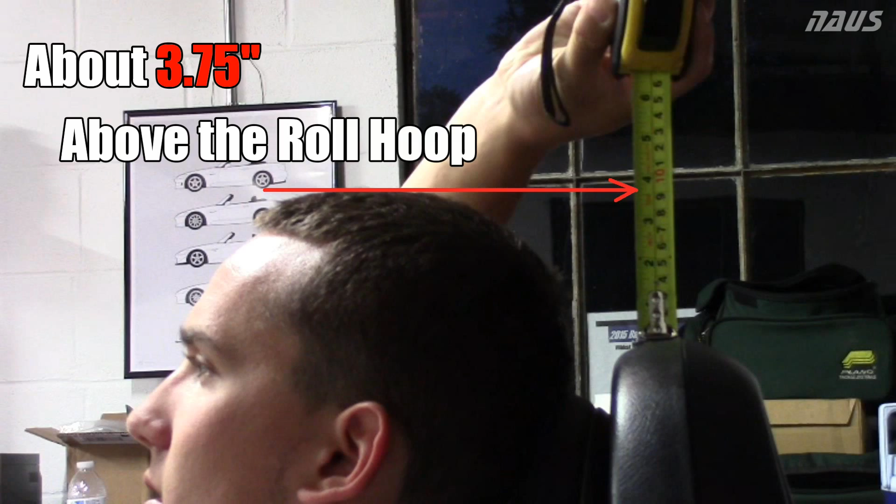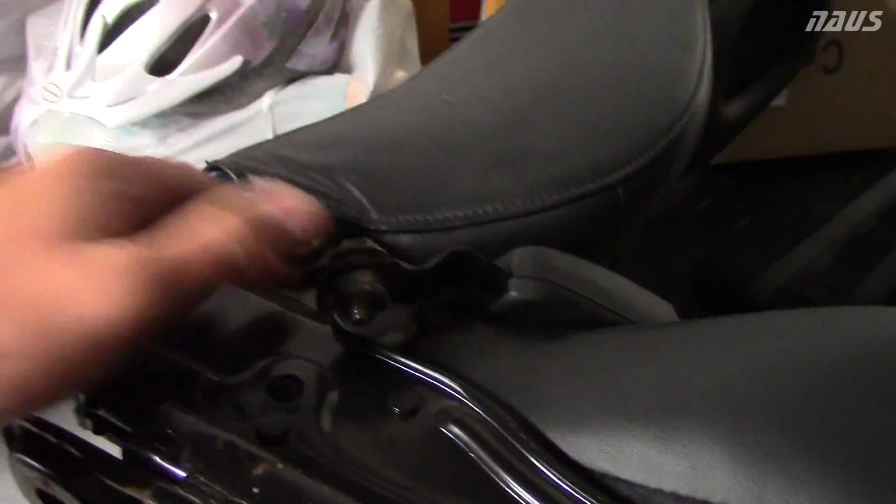Alright, so here's the stock AP1 seat out of the car. It's very easy to take off. You got two 14mm hex head bolts in the rear and 12mm up front. So there's a 14mm bolt there, just pops out of that hole there.

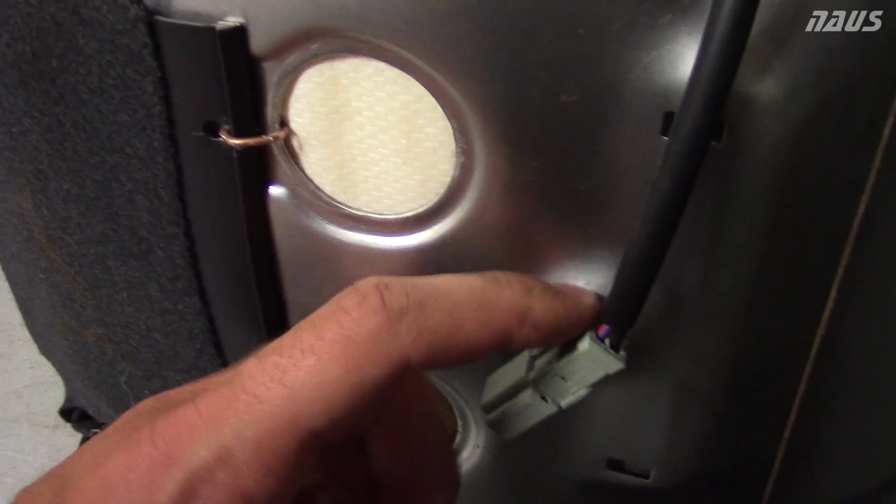And in an AP1, it's great because there's only one sensor hooked up to the entire seat, and that wire is fed through this cavity between the leather and the mounting frame of the actual OEM seat, and it just runs alongside with a clip here, and then on top of the sensor connector, and that's it. And you can swap that over to the new seat. You'll have no lights on the dash and life will be good. Alright, so the seat belt sensor is off and ready to be swapped in to the new seat.

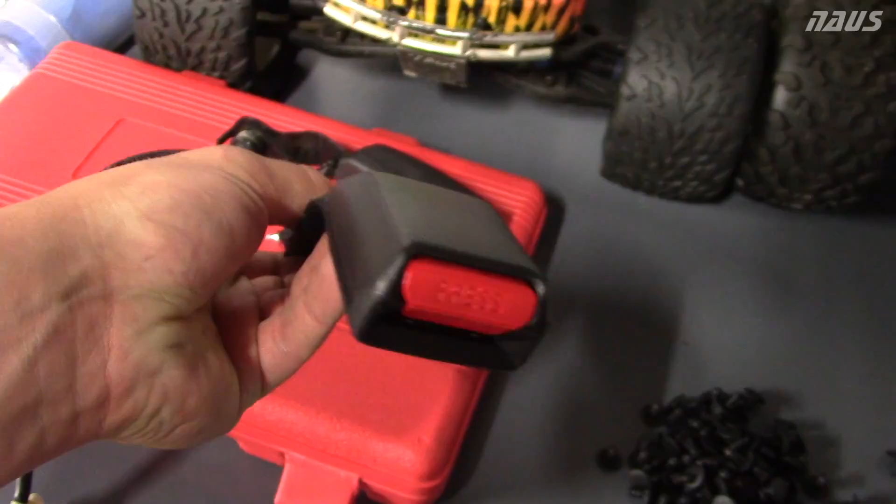What you're going to need if you're running the stock seat belt with an aftermarket racing bucket seat is an aftermarket seat belt extender. This is from 4extender.com. It's a pretty common site I read online where people buy these extensions from. So basically you're going to mount this one to the Buddy Club seat rail and then extend this one off of it and feed this through the little loop in the side of the bucket seat, so you can plug the factory seat belt into the bucket seat without much of a hassle.

If you didn't have the extender on the driver's side, this would be mashed in between the center console and the racing seat bolster. It would be a pain to buckle and unbuckle every time. You'd probably have to stick a key down into it. You wouldn't be able to reach it with your finger to unlock the seat belt, which is why you need the extender.

So I got the Buddy Club rails in here, just test fitting them. They don't line up perfectly, but I guess you get what you pay for. But I'm going to actually just sit in the car on the floor for the hell of it to see how low my head is. Alright, so here's me getting in the car with no seats in it. Let's see how it fits.

Man, it must be nice to be short. I'd be getting on a track no problem. But with a helmet on, I'd actually come close to being too tall for the stock roll hoop still. So my plan is to mount the Recaro as low as I can and see how close I can get to getting this low in the car.

Alright, so here's the brand new Recaro Pole Position N.G model. Basically what I've done so far is I just put some painter's tape where the brackets are going to be hitting, just so it doesn't scratch it up when I test fit it. These are like little plastic stickers that come with the seat when it's brand new, that you stick on the actual fiberglass shell itself, so that it's got a washer that sits on top of that, and the washer won't mark up the shiny fiberglass.

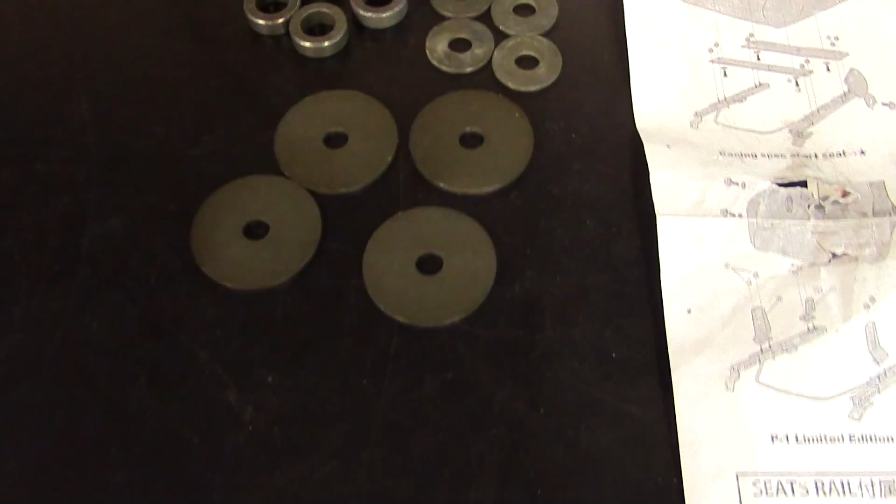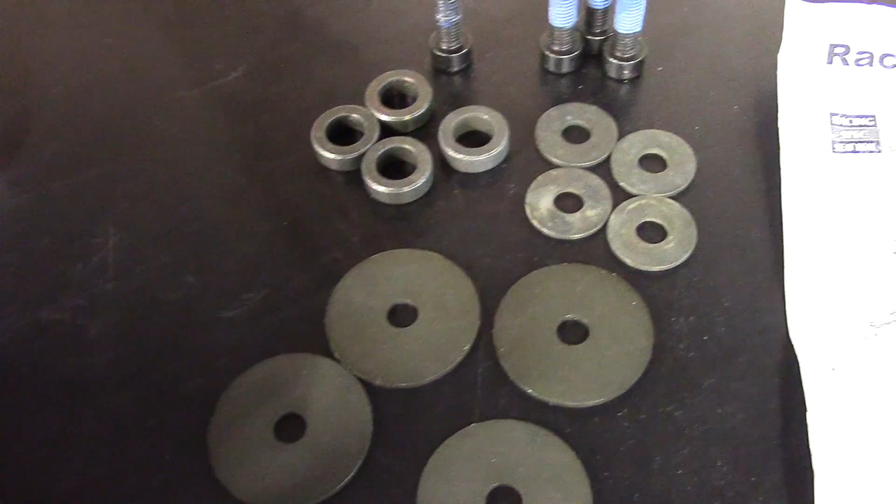So the hardware that comes with the seat's actually pretty nice and thought out pretty well, so you don't damage the seat or anything when you install it. So this here is the Recaro hardware that comes with the seat. This one doesn't have thread locker on it because I test fitted that already and made sure the threads threaded in cleanly. But I'll explain more later of where to place all this hardware when you're installing the seat, but this is the hardware that installs between the actual fiberglass shell of the seat and the Buddy Club rail.

So this right now is my setup. The Buddy Club rails are kind of just laying in the car. The side mounts here are loose. I put the taller brackets up front just from what I've seen online. And the Buddy Club picture up there that's all in foreign language is showing a diagram with the taller brackets up front, so that's what I'm going to go with to start.

And the only thing I should note is I went out to Home Depot and bought my own grade 10 hardware here, instead of using the OEM bolts, because the OEM bolts are a little too low on thread engagement. Since the Buddy Club rail thickness is a little more than the OEM mounts, you get less thread engagement and it wouldn't be as strong of a hold. So I went out and bought, up here, an M8 by 1.25 thread with a 30 millimeter length. And then I bought a flat washer that's kind of wider than the opening, since these openings are pretty wide from Buddy Club. And then a split lock washer as well.

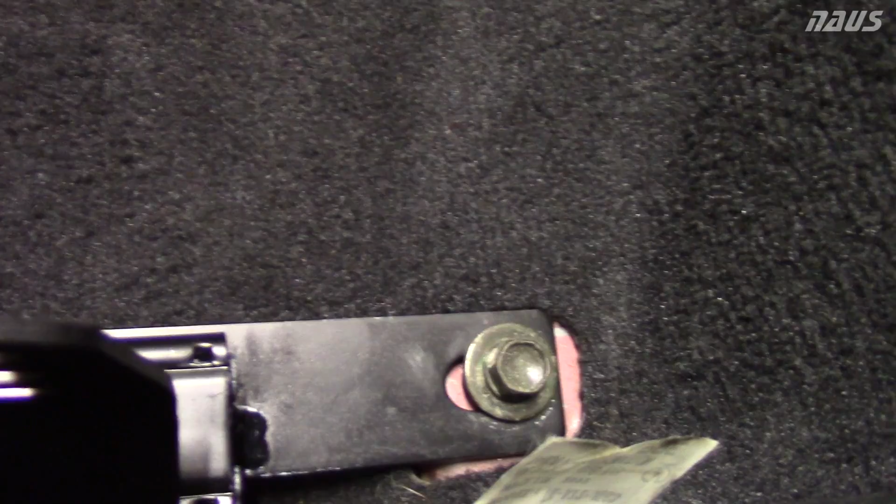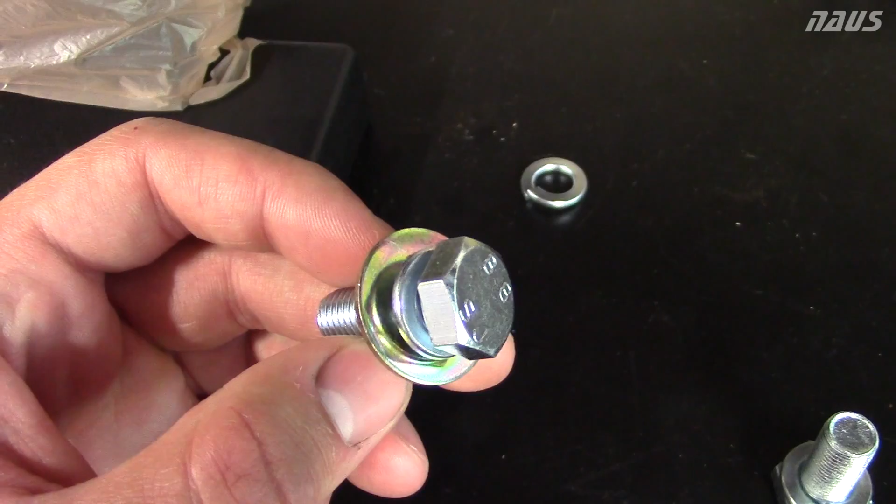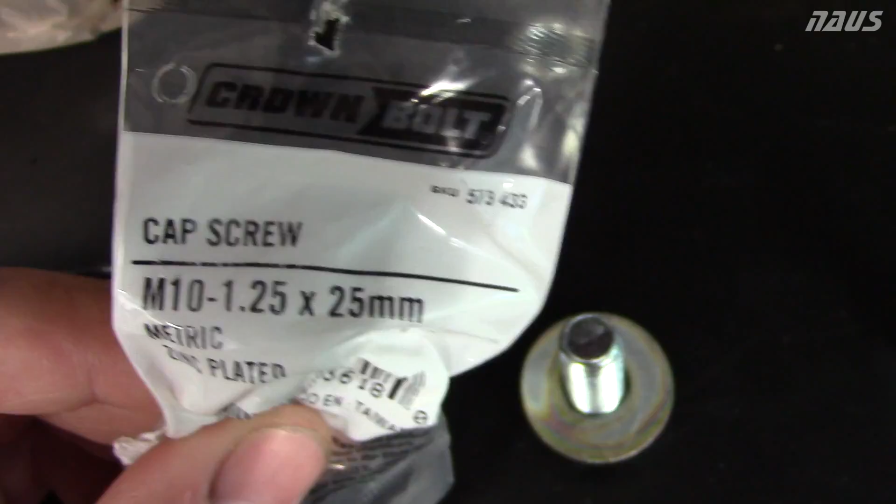And for the back, that's the OEM bolt, but I'm taking that out. And these are the bolts I bought for the back that are going to replace the OEM bolts, because here's the other one too. The thread engagement's not super great. It kind of bothers me, so I want to do it right. These are quite a bit longer, and this is an M10 by 1.25 pitch, and it's 25 millimeters long, I believe. This is the bolt for the rear two spots of the seat that are going to go right into the frame. So yeah, everything right now is just in there loosely.

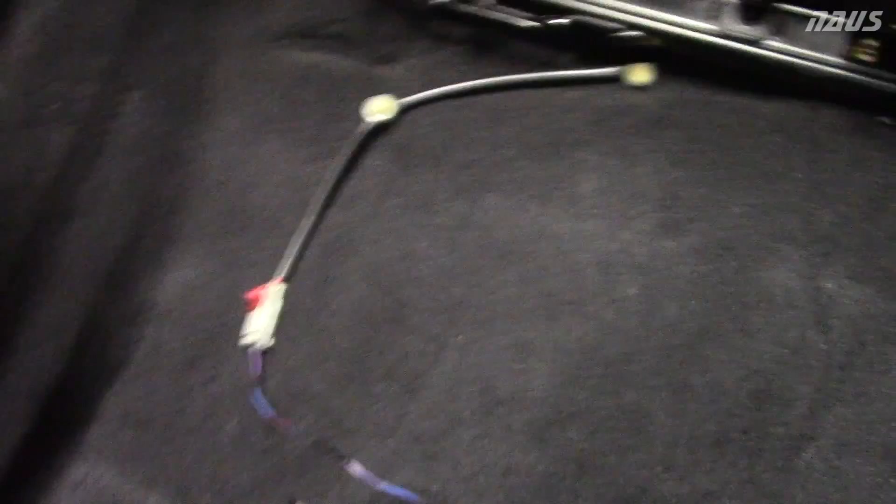The seat belt, I'm not sure if I'm going to keep it like that because I have a seat belt extender plugged into it. But this is kind of bent sideways and it gets really tight in here. It's going to be a real pain in the ass install, I can tell right now, because there's so many spots for adjustment. The rails themselves have play to the floor with the wide slots. These, I don't know how I'm going to adjust these and tighten them when the seat's in there, because they slide in and out and back and forth a little bit. And then when you put the seat in, you're going to have adjustability in these slots here. And since these rails are separate on each side, it's going to be really tricky to get this thing squared up and slide nicely back and forth and in the right seating position.

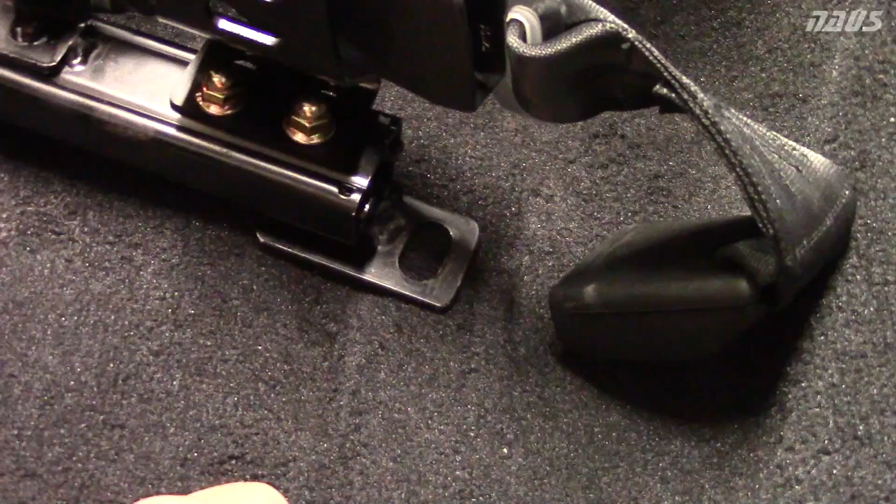As I said before, I really want to get the seat as low as I can, so I'm going to see what I can do, the lowest spot I can mount it on these brackets here, and hopefully I'm going to be able to set the fiberglass shell touching on the carpet, and I'm going to push down as hard as I can, see what kind of notch I can get out of this, and go from there. So the only other thing I had to do, and it's a complaint I have about the Buddy Club's quality, is there's a weld on the back of this that almost touches the slot.

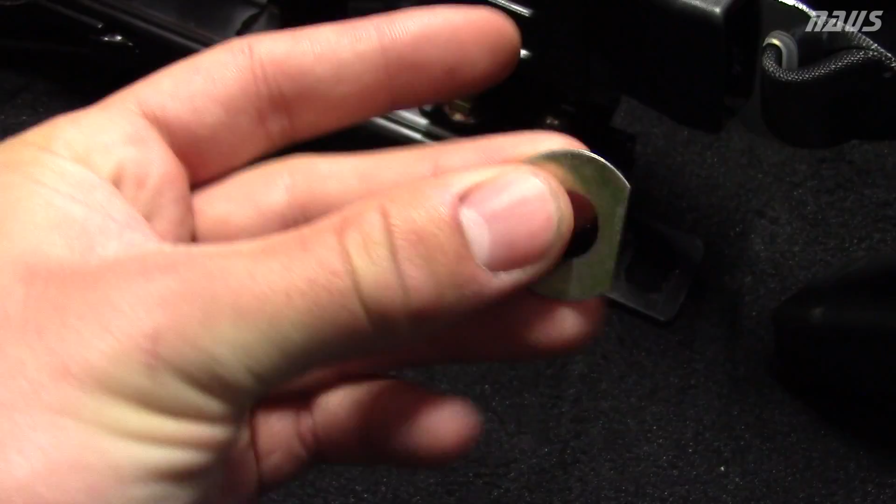So if you put a flat washer on there, it's going to ride crooked on the weld. So what I had to do was take a washer from Home Depot and sit there and sand the side off of it and make it flat on one side so that when I put it on, it lays flat, but also has room to clear the weld. And I'm sure each rail is going to be different with how far that weld comes out.

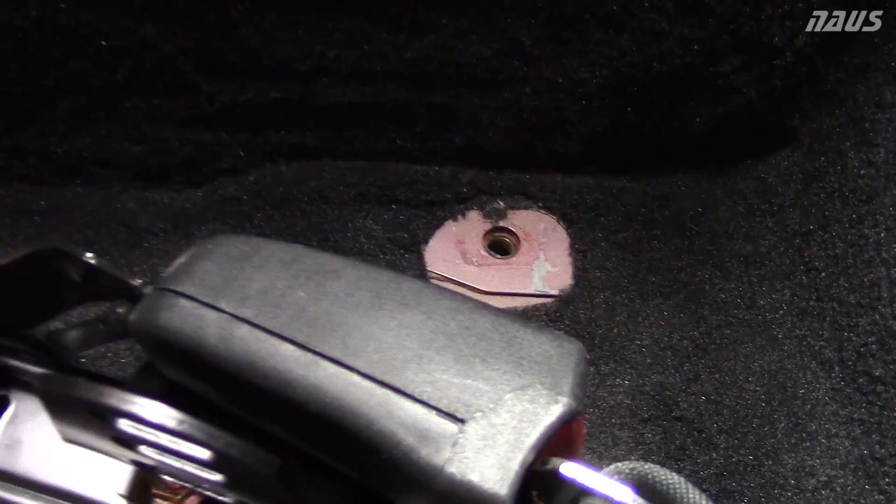And I mean, you can do this one of two ways. You can grind the weld down, or you can grind the washer down to make it fit. But if you try to install it at an angle, you're going to side load the bolt and it's not going to be very safe. So definitely don't want to mess up the threads in the frame of your car. Definitely not something I want to do. So I took the extra time to sand that down. I want to make sure all the flat washers are sitting flat when we go to run down these M10 bolts.

Alright, so the seat is in, but it's loose right now. What I did was I pulled these brackets out as far as they could go away from the seat and tightened them down to start. The seat rail bracket bolts to the car are still loose. I just want to show you the seat belt setup. This is the extender, and right here is the OEM seat belt.

So you still have the sensor that's plugged in underneath the seat. The only difference will be, since this extender is always plugged into the seat belt for the car, the light will never appear on the dash that the seat belt is not plugged in. Doesn't bother me really, but that's how much you have hanging out.

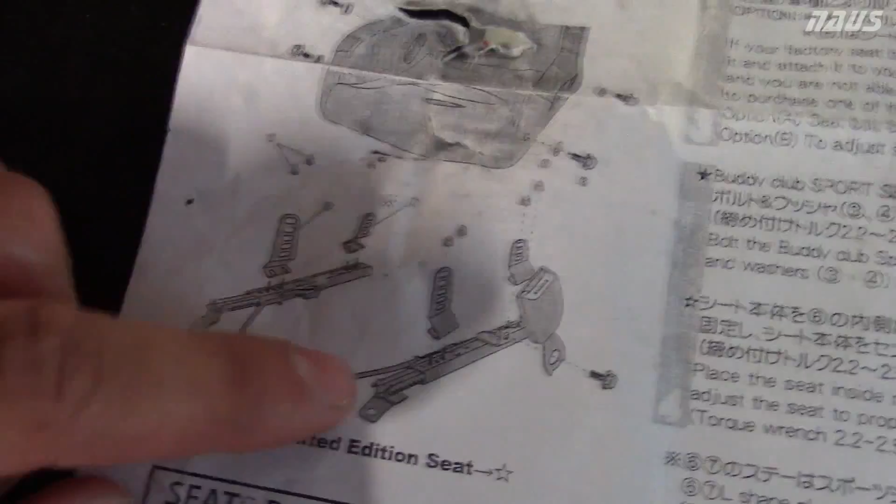So again, this is the Buddy Club Japanese looking instructions that show the taller brackets in the front of the seat rail and the shorter ones in the rear. But the main directions you really need to know: this is the instructions that come with the Recaro Pole Position seat. As you can see, this is the NG model. It's the brand new model that's FIA certified. That's the OEM Recaro brackets that come with it, but we're not using those.

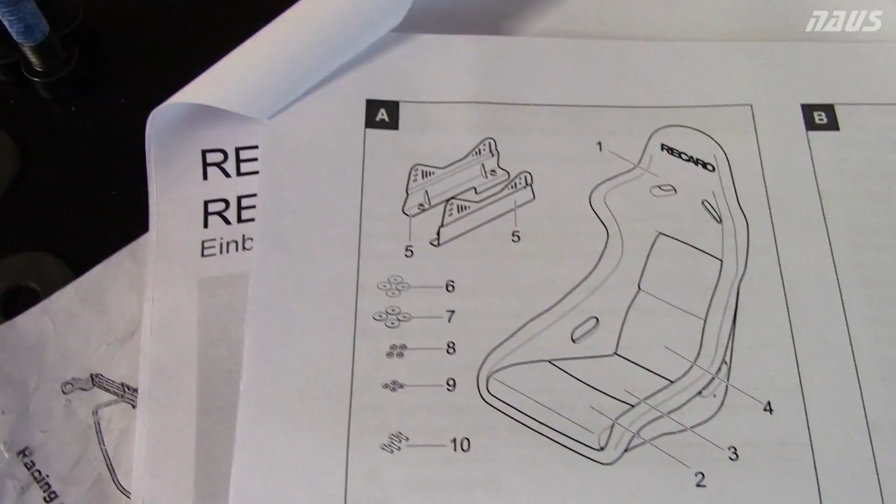That's just a list of all the hardware you should have got. Number 6 is the plastic protectors I showed you that are already put on the seat. Number 7 are these large washers here. 8 are these spacers. 9 are these flat washers. And then 10, of course, are the bolts.

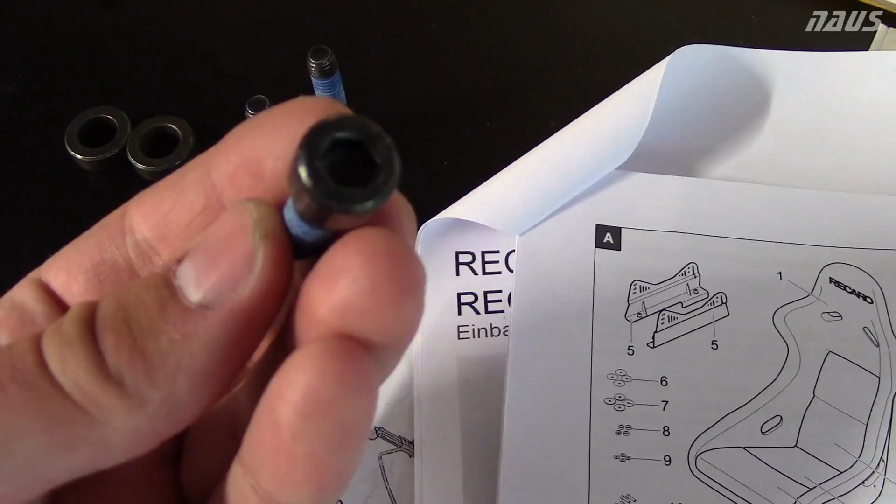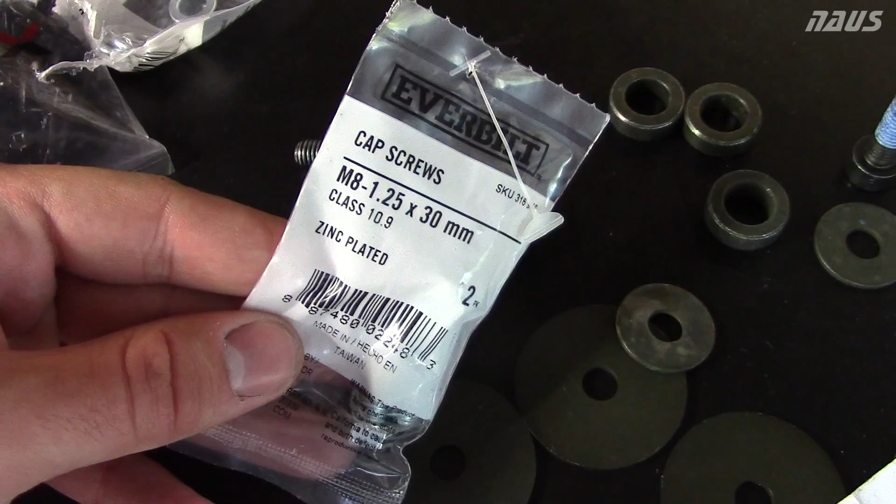Now these are M8 by 1.25 bolts as well, and since they're Allen key, I didn't know if I'd have enough room with the Allen wrench to get in there and tighten them based on how tight the seat is in the car. So I went out and bought a similar length screw that's an M8 1.25 pitch, just because you can get on it with a hex wrench. I have the ratcheting wrenches as well to use on those, so you can literally just go down straight and tighten them.

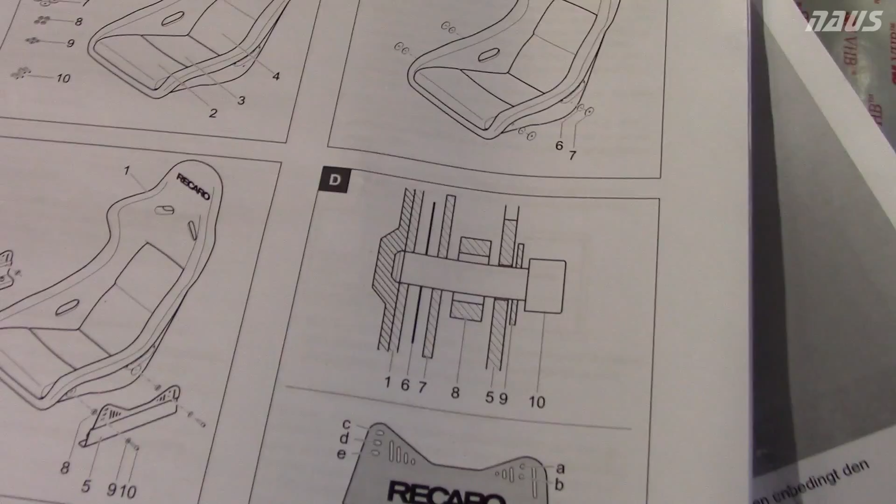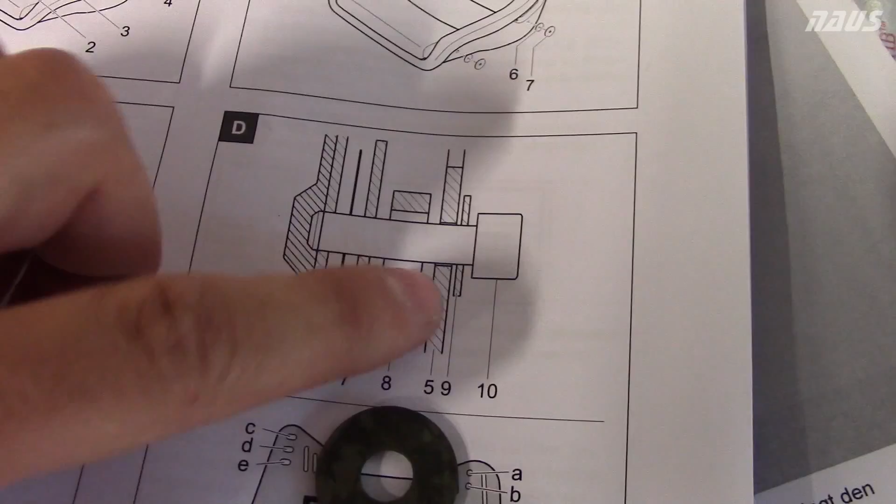So the instructions are very basic here. This is really the only section that really matters. It shows you the order of where to put the hardware. You basically start with your bolt on the outside of the Buddy Club bracket. Number 5 is the Buddy Club bracket. And you put your bolt through the smaller washer on the outside, and then you put the spacer in between the bracket and the large washer. So you put that there, and then you have your large washer right there.

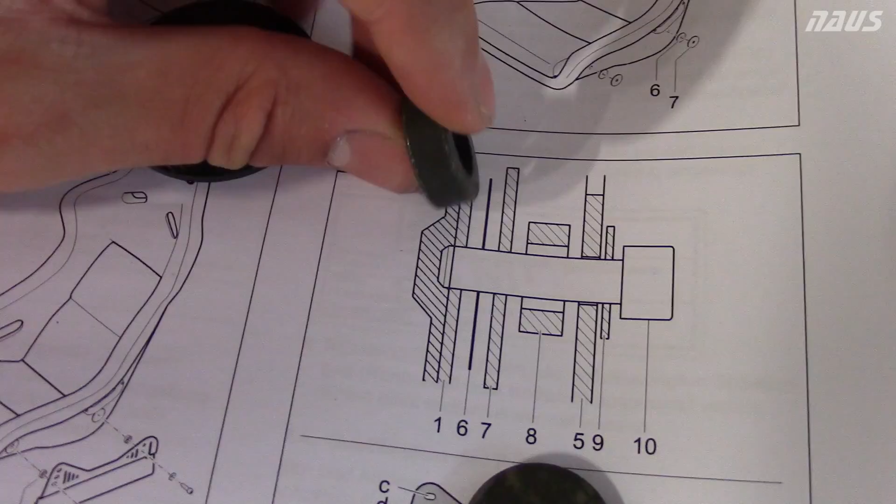And then that thin piece right there is the sticker that I already put on the seat, and then that cross section there, number 1, is the seat. So that's the order you're going to do it. You want these spacers in there so the brackets aren't physically bent up against the seat. So we're going to go ahead and give that a try now.

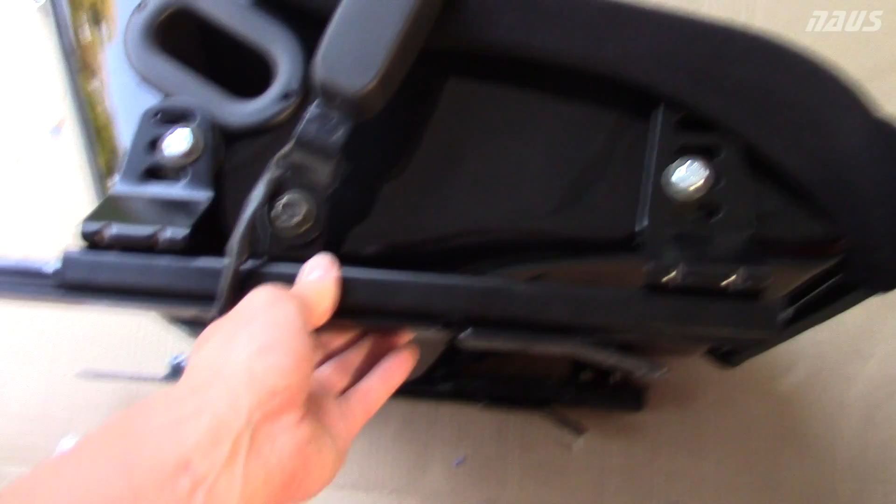Alright, so I determined it was an absolute nightmare to put these bolts in when the brackets are already mounted in the car and you're trying to slide the seat in. So I'm installing the bracket, I'm leaving it slightly loose to the seat from outside of the car, and then I'm going to try to align it in the car.

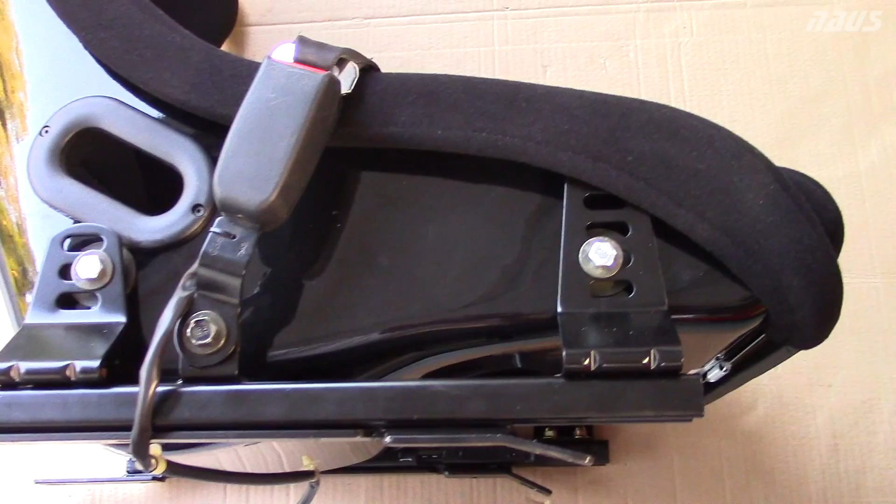The only problem is now I can't get to the brackets that adjust these, and those are locked down as far out as they can go. So I'm going to try to throw it in there and see if it lines up close. If not, it's going to be a lot of taking it out and putting it back in and trying to tweak it. Before you get too far, make sure you undo the bolt at the bottom of the factory seat belt, way down here, and then feed it through this hole and then re-secure it to the factory point.

Alright guys, so the seat is in and it is all tight. I'm going to be honest, it was a royal pain in the ass, but mainly because I had to teach myself all the little tips and tricks on the way of how to tweak all the brackets and everything. So I started filming this video 9 months ago, and here I am back to finish it.

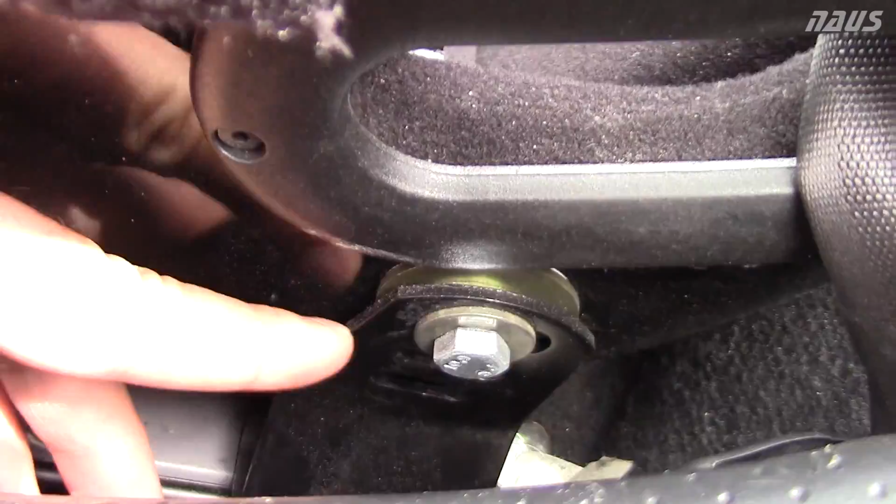But to continue on, the final setup of the Recaro Pole Position, I wasn't able to use the original slots I had the seat in. As you can see here, I have to use the top rear bracket mounting point, and then up front it's on the 3rd from the bottom, but you can also go 2 notches higher. As you can see, I'm towards the back of the slot too to get the seat back as far as I can get it. It's on the 3rd from the bottom in the front, and also the 3rd from the bottom in the rear, which is the highest setting in the rear.

The main reason for that is that the floor on that side has a bump with part of the frame. It kind of bumps up, and on the 2nd notch with the Pole Position, the seat bottom of the fiberglass shell actually hangs below the bracket, and when you tighten down the rails, it's actually pinching the seat to the floor, and it's impossible to slide it.

So by going up 1 notch, I have about a pinky gap underneath the fiberglass shell on the far side and the floor of the car. So that's not ideal for as low as you can go. I mean, it can get a half a finger gap lower, but that lower slot is too far. So it's almost like it needs a slot in between the 2nd and 3rd to be perfect.

So here's a look at the seat fully slid back, and the clearances and whatnot. You can see a lot more behind the seat than with the factory seats. You can see the shell is pushed up against the leather part, more so down here where my finger is. It's just touching that. The extended seatbelt actually works perfect. It fits me very well, and you can see the factory seatbelt over there. It's been like that for a long time now. Never had to undo it.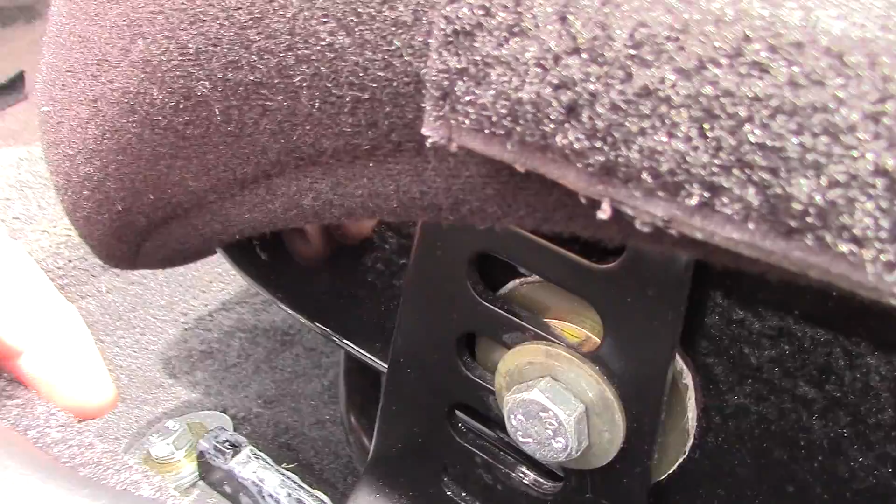Another issue I ran into as well is that if you use the Recaro spacers on each side of the seat, it pushes the seat brackets too wide, and when you mount it to the floor, it kind of bends both of them inward and it binds up the rail. So to actually get a good alignment, I replaced the spacers with a flat washer, as you can see right in there. And that is probably 1/3 of the thickness of the spacer. So by doing that, it brought the rails, I'm gonna guess, 100 thousandths of an inch closer to each other, and kept them straight up and down now when you bolt it to the floor.

So right now I can slide the seat back and forth very easily. Like I said, I white lithium the hell out of the rails before I put them in the car, and been racing this car all year this year. I'm really behind on videos, but I'll get them up.

But my favorite mod to the car so far is this seat. I'm 6'3", and it really changes the driving perspective. It really feels like a new car inside when you lower your head and sit lower in the car, and you really feel locked in with these seats. You don't slide around at all. So it's been a huge game changer for me with this car.

So one last clearance thing I'll show you is the factory seat belt right here. You can see how close it is down to that mount. It's actually pinched between there a little bit.

If this bracket was any further towards the edge of the car, it wouldn't work at all, but it's a very tight fit. As you can see, it's got a little wiggle room. Of course, when you slide the seat forward more than an inch, that bracket doesn't interfere with the factory seatbelt mounting point, but that also took some finagling to get in there. But overall, everything fits good. Just took a while to get there.

Alright, so I'll just do a little demo here to show you guys how I get in and out of the car with the seat in there. It's really not that bad. So you just put your hand on the center console, swing your feet in, and I put my hand here, and then I try to drop straight into the seat. If you try to swivel out of the seat, you'll really wear this velour material out quick. So that's why I added the leather Recaro side protector.